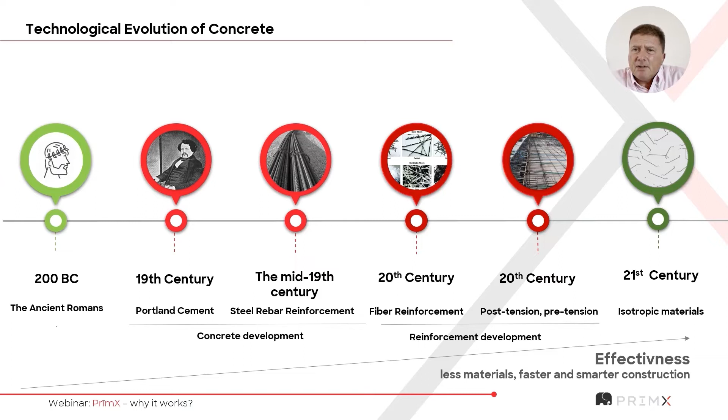So far, so good. So what does this mean in terms of how we build things then? Well, if we consider, as an example, bridging a gap, there's always been the option to fill the gap and generate a causeway. And if we don't have materials of the right shape handily available, we could always start to use a concrete type material, a cementitious type material, to fill that gap, which is great.

Unfortunately, of course, you'll tend to get, in the case of a gap such as this, a water build-up, for example, on one side or the other, and it's not a particularly strong structure when subject to hydraulic pressure. And of course, as we all know as engineers, there is nothing more destructive in the natural world than water, or possibly compound interest.

However, there is nothing to stop us bridging a gap, if we wish to, with plain concrete. It's just that, as a rule of thumb, whatever the width of the gap is, that width plus a little bit will be the depth of concrete that we use to bridge it.

However, if we use steel bar, we can actually start to reduce that section depth of concrete. And if we put that steel bar into tension, then we begin to reduce that section depth even further. And this is before we start looking at cable stays and so on and so forth, as a means of suspending bridges. So push all that off to one side for a second. There is a method to my madness. There's a reason for mentioning bridging gaps.

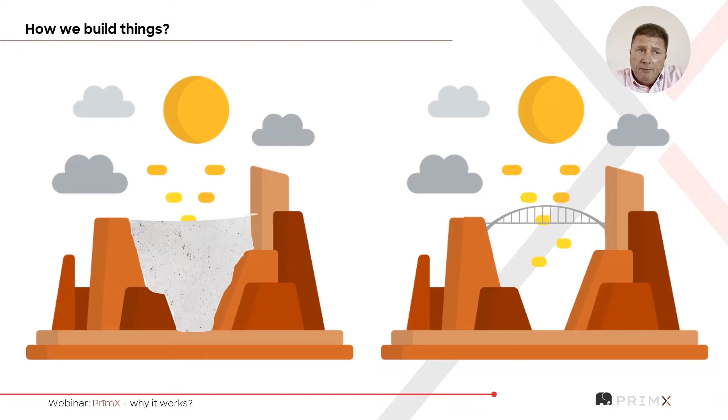Because, of course, as we develop the use of concrete for floor slabs, we begin to see that for ground-bearing applications, fully loaded, and particularly in the context of a modern distribution centre, for example, the part of the slab that's under the most pressure is actually at the bottom of the slab.

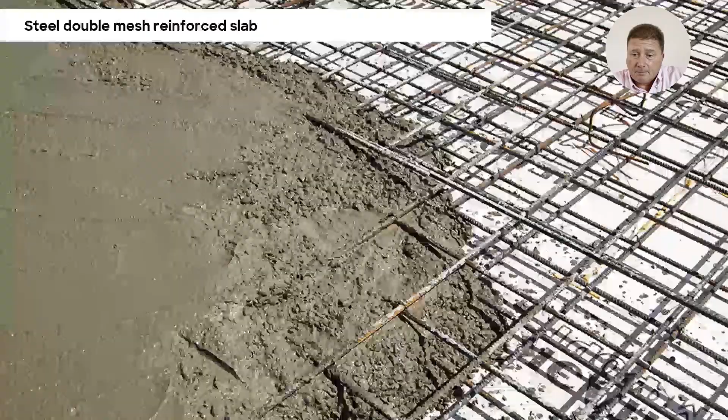That's in tension. The top of the slab is usually in compression, although of course if you've got a block-loaded slab, i.e. a significant UDL, and you've got gaps between those loads, you can get a hogging moment in the aisles. Okay, so what's the answer? Well, we can use mesh fabric. But what does the mesh fabric do? Well, it increases the flexural strength of the concrete on the side that it happens to be up against.

Okay, happy with that. But actually, isn't the purpose of the mesh fabric really to control the joint behaviour? What do you mean? Well, for example, if we were to just leave that mesh fabric in that concrete over a large area, laid extremely thin, we're going to get a huge reduction in volume because, of course, concrete shrinks. It's what it does. It uses a proportion of the water in the mix for hydration purposes. The rest is free water, and we get a reduction in volume. So we're going to get cracks.

Okay, so what's the answer? Well, we put saw cuts in. Okay, so what do the saw cuts do? Well, the saw cuts relieve the shrinkage stress where we put them. In other words, we're forcing a crack to occur where we want it to occur. Okay, is there a problem with that? Well, in many cases, no, not really.

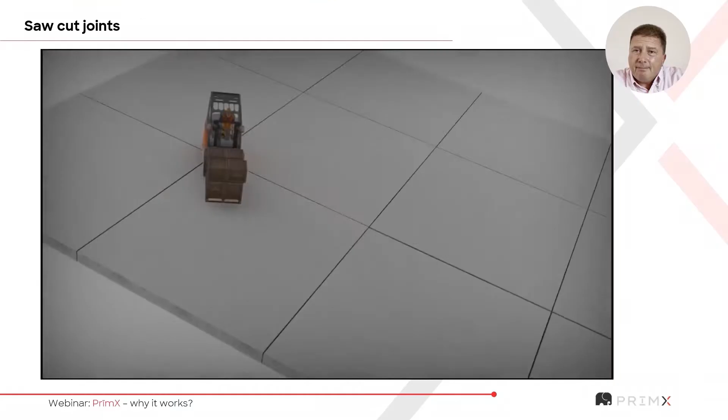But actually, in distribution centres, that's quite a significant problem because these are subject to high traffic intensity. And those forklift wheels, they're not softened in any way, shape or form. They're normally quite hard, quite durable. And as they rattle over a saw cut induced joint, they'll set up a bit of a shock wave, which in time will result in arris damage and the breakdown of the slab. Okay.

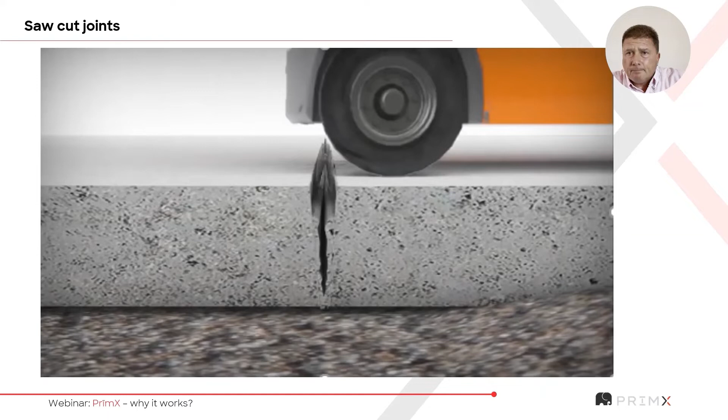And then we've got to say to ourselves, well, what about on pile supported slabs then? Because whilst mid-span we are in tension at the bottom of the slab, over the pile we've got a hogging moment, and they can be quite significant. So we're going to need more reinforcement there, and now we're going to have to start considering shear. And it all starts getting really dreadfully complicated. Well, it does. Of course, we could consider a post-tension floor slab.

What's the point of post-tensioning? Well, post-tension means that we run a series of tendons throughout that concrete, left to right, far to near, however you want to put it, and we put those tendons in an arrangement such that when we stretch the tendons and lock them off, that concrete is in permanent compression. Bit like a drum skin when you think about it.

I don't know if you've ever actually rattled around with a drum. I had a set of Mexican bongos when I was a kid. They were great fun. They worked. It didn't matter what you did to them, you could pat away at them all day long. Because that drum skin was in tension, it would just give a satisfying noise that drove my parents insane. But you know what? Unfortunately, one day, I slackened off the drum skin. And you know what happened? I put my little hand through it.

What's the relevance of that? Well, if we actually post-tension the concrete as a flat plate forming a slab, we make it very, very tough. We make it very strong in flexion. We actually give ourselves a bit of dimensional stability, and we've certainly got shrinkage control. We don't have the opportunity to develop shrinkage cracks because that concrete's in permanent compression. And we increase the load capacity significantly.

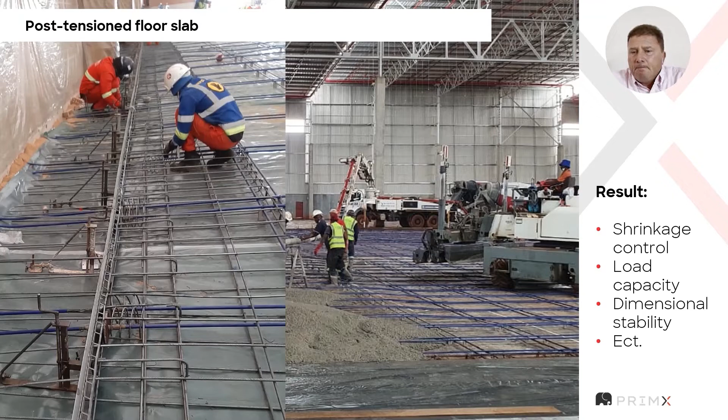Which brings me on to the PrīmX floor slabs. Now, interestingly, PrīmX floor slabs are predominantly steel fibre reinforced. So what do you think? That's old hat. We've been doing that for 30 odd years, nearly 40 years. Well, we have, that's right.

And we've been producing joint-free floor slabs for probably about 35 to 40 years, where the steel fibres are incorporated into the concrete in such quantity that they control the effects of shrinkage. So instead of having to put a saw cut in at about every 6 metres or so, we can let the panel size increase to about 40 metres or thereabouts, and that concrete will simply reduce in volume, and that's great.

And we don't need to put a saw cut in. That's fantastic. But the construction joint is actually quite wide. Can be quite wide. That's a bit of fun. The shrinkage is something in the region of 1 to 2 millimetres for every 10 metres of slab span. So if we have two 40-metre panels side by side, the joint in the middle can open up anywhere from 8 to 16 millimetres. 20 millimetres is not uncommon. That also is a function of the aggregate grading and the aggregate type and so on and so forth.

However, PrīmX has, fortunately, been part of a European research program for the last almost 30 years, developing what we call second generation shrinkage compensating materials. What exactly does that mean? Well,

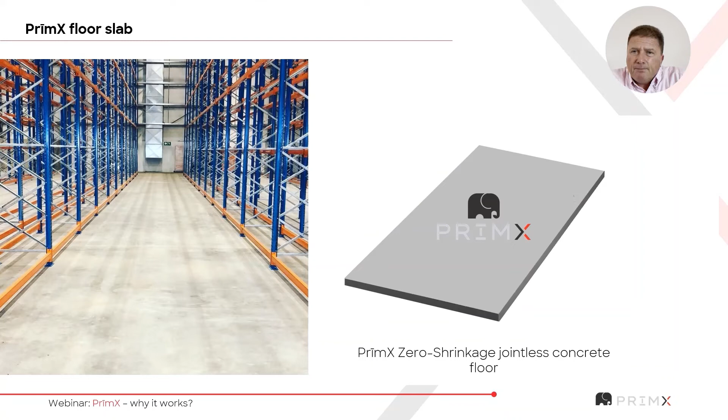if we think about the hydration process of concrete itself, we've got cement, we've got water, we've got sand, we've got coarse aggregate, we mix them all together, and a chemical reaction occurs with the cement paste, which starts to form things like tricalcium silicate, etc., and all of this stuff reduces in volume. It acts like shrink wrapping. It pulls everything nice and tight. It's actually where we get our compressive strength from.

A shrinkage compensating admixture will actually work by a delayed process. As the concrete itself starts the shrink wrapping process, as the cement mortar does its bit, it's reducing in volume, shrinking, pulling everything tight. So we have a delayed reaction and the formation of expanding minerals, ettringite particularly, which actually starts to force the concrete apart at a microscopic level. Over time, this ettringite in turn changes its state and reduces slightly in volume.

Effectively, we have almost like an accordion effect. The concrete starts to strengthen, reduces in volume, starts to expand slightly, starts to reduce slightly. But the net effect after about 14 to 20 days is that the concrete is around about 300 to 400 microstrains larger than when it was laid. And what does this mean to us? Well, to all intents and purposes, we have zero shrinkage.

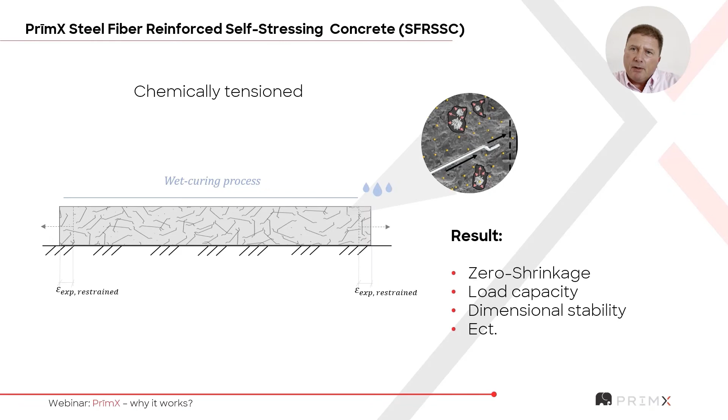So far, so good. But it does mean as a company, PrīmX has to consider the fact that this is not something you can just let loose on the industry. We have to regulate it. We have to take care of the material itself to make sure that in the first instance, the concrete mix design that we come up with is bespoke to that area.

So in other words, we're using the materials that you have available locally at the area, at the source, at the point of production. We're testing those in a laboratory. We're working out exactly the proportion of shrinkage compensating material that we need in there, and the type and proportion of steel fibre that we need in there to give us the mechanical properties that we need to satisfy the design.

This is all backed up by full-scale testing and the use of our proprietary quality control system throughout the entire process, which enables us to give a test-assisted production on a day-to-day basis on the job site. We can talk to the laboratory about any issue that we have on site, change in ambient conditions, change in cement type, any issues that affect the batching of the concrete, really. And we can have an answer there and then that's informed by concrete technicians who are trained specifically for this process. Everything that we do at PrīmX is a research-based activity.

We would rather interpolate for accuracy than extrapolate for effect. PrīmX is one of the very few companies in the world that will design and build your industrial floor slab that actually has a research and development centre. And this isn't something that's lip service to promoting what we do ourselves. This is a research and development centre that actually assists with EU research projects. We work at CERN, for example.

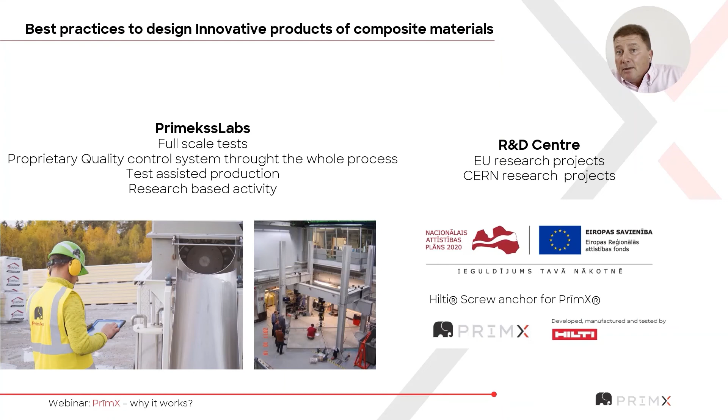Oh, maybe I couldn't say that. Who knows? We'll see if I get away with it or not.

However, we still have to fit PrīmX into the design codes and standards that exist. So how do we do this? Well, that's perhaps not as easy as it seems, in the sense that you are aware there are no design codes for ground-bearing or pile-supported floor slabs. They don't exist. We have design codes for structures. We can design and build elevated slabs with design codes, and we can use linear elastic design models if we wish, which of course means that the concrete is not going to crack.

We could look at technical reports such as TR34. And TR34 is actually quite kind to PrīmX in the sense that it makes it very clear that post-tension concrete exists and can and should be used. In fact, TR34 makes it very clear that if you, as a client, want to have a crack-free floor, then the only real practical alternative you have to plain reinforced concrete is to use a post-tension system, such as PrīmX.

We can design to ACI 544, which is a very interesting document put together by a fascinating institution, which at the end of the day is all peer-reviewed. So it carries, to my mind, the same weight as a design code. And in fact, if we consider the full-scale destructive testing we do and the laboratory testing that we do at PrīmX, it is very easy to see that PrīmX provides test-assisted designs that are fully compliant with BS EN 1992.